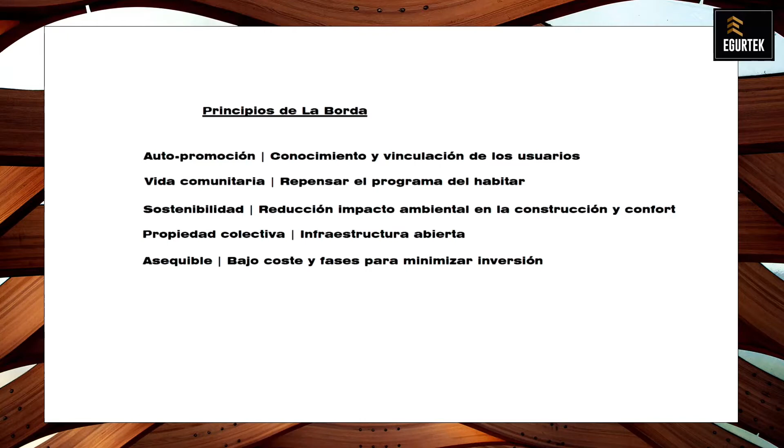Wood was very significant in making it possible to reduce the investment. It makes it possible to carry out cost reduction, and also makes it possible to work in phases and end up providing a high value structure. These are the users, the user participation from the beginning. They wanted to use wood. The uses included a community dwelling.

And this involves areas such as the energy issue with centralized energy systems. There's also the mobility issue. Finally, we did away with the underground car park. And we have health issues, domestic economy issues, a different way of thinking about the more classic dwelling. And these are elements that have been under discussion for many years. This doesn't mean less for us, it means more.

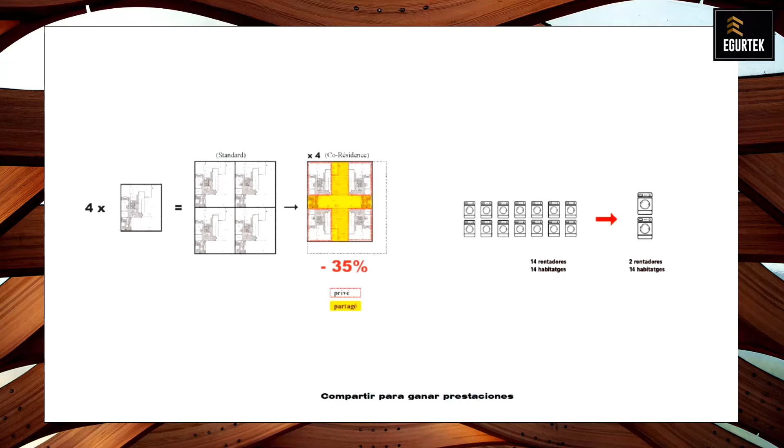Reducing the private spaces that need privacy and comfort 24 hours a day, and this has been partly replaced by common areas such as the laundry area or dining areas that mean fewer requirements. And here we had a shared laundry area, dining area. And this also made it possible to reduce or do away with the car park.

This was obligatory according to the regulations in Barcelona, but the ordinance was changed for the city to reduce the number of obligatory parking spaces for dwellings. The regulations were 40 years old, and as so often happens, regulations change much more slowly than society does.

And there are contradictions. You may be trying to design a building with a very low environmental impact made of wood, reducing CO2 emissions to 200 kilos per square meter and putting your stakes on innovative material. And on the other hand, you may have the obligation of having one or two story basements to be used as a car park, which means that to park a car, you're going to have a much higher environmental impact than the savings you're achieving up top. So this is a key issue, and there isn't an underground car park in either one of the projects.

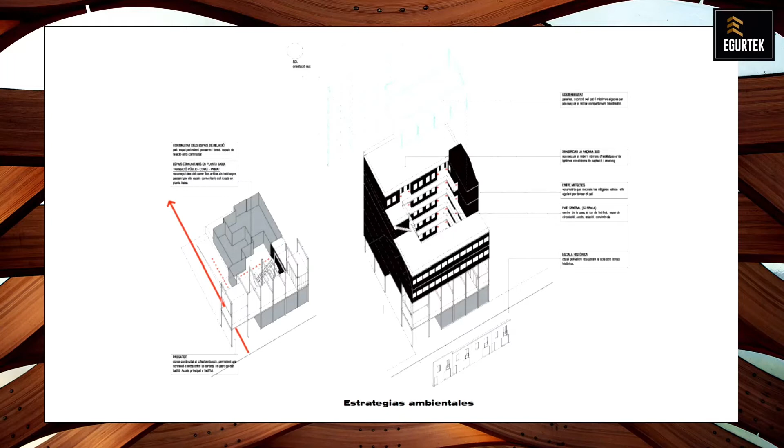And we had abundant glazing on that south facade. While on the north facade that faces the street with more noise, we reduced the number of dwellings on that side. And this was the multi-purpose area. It was left as a collective space for all kinds of uses with a low performance level. So this is the summer and winter approach.

In winter, closing the roof to make the most of sunlight, with a low need for heating along the south facade, which is catered for with small radiators. And on the north facade, in the 4 dwellings we have on that side, we improved the insulation through the carpentry work design, and their heat demand is 10 times higher because they don't have the benefits of sunshine during the winter.

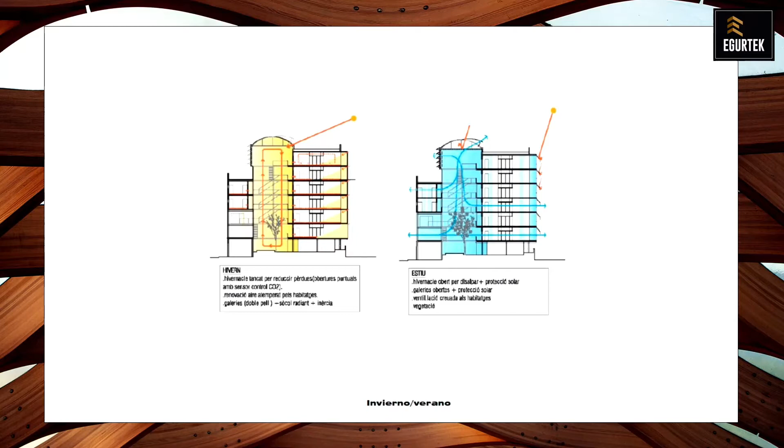We used wooden blinds on the south facade, and cross ventilation was maximized, with no active measures for summer, just the possibility of fitting ceiling fans to provide 3 or 4 degrees more comfort. On the ground floor, the building, as we see later on, is clearly separated with 2 types of structures, a concrete structure.

For us, it was important to recognize this public area and to differentiate it from the material of the structure. And this enabled us to deal with damp issues, fire resistance issues. We have a fire resistance requirement of 120, which is a problem with wood and with the suitable wood coatings. We always try to reduce the number of layers because of cost issues.

And here, with concrete, with outlining, we could obtain the necessary performance. And this plinth makes it more resistant for this public area that was going to be connected to a future public park and a cooperative store. Then the stairwell, the lift connects the street with the future park.

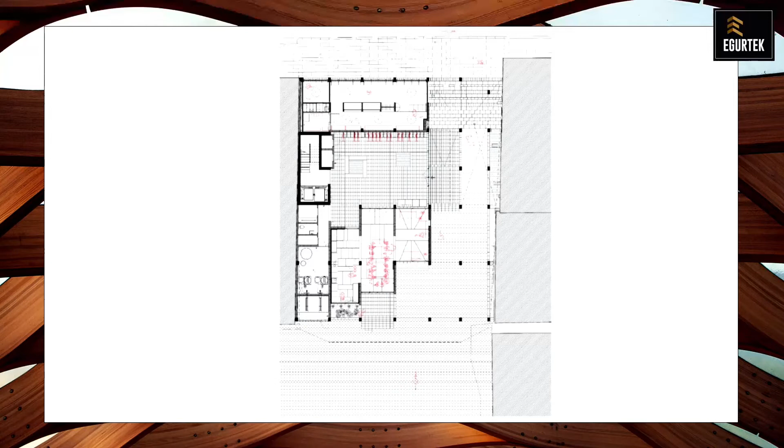And these vanes are related to the wooden structure. In this case, the bearing walls are perpendicular to the facade. These are improvements we made later, bearing the structure more on the facade, and this means that there are practically no compartments, and the rest of the partitions are designed by the users themselves according to their own needs.

The building was completed and was ready to hand over to the cooperative. We have only 120 CLT thanks to these small vanes of 360. We use the necessary coatings to provide fire resistance and also acoustic insulation with gypsum plaster to provide that acoustic insulation.

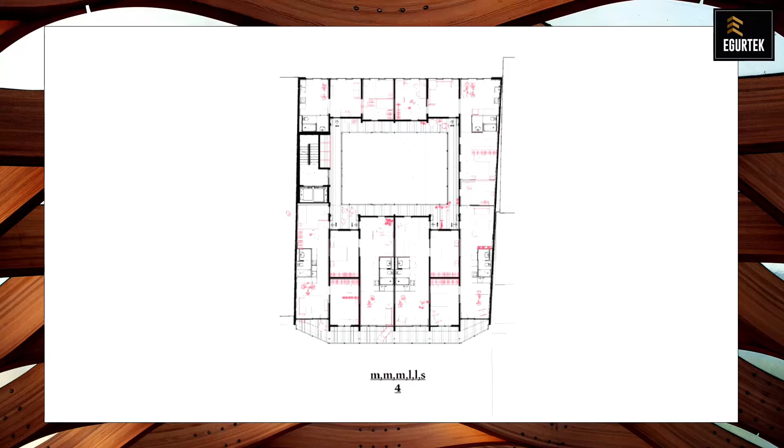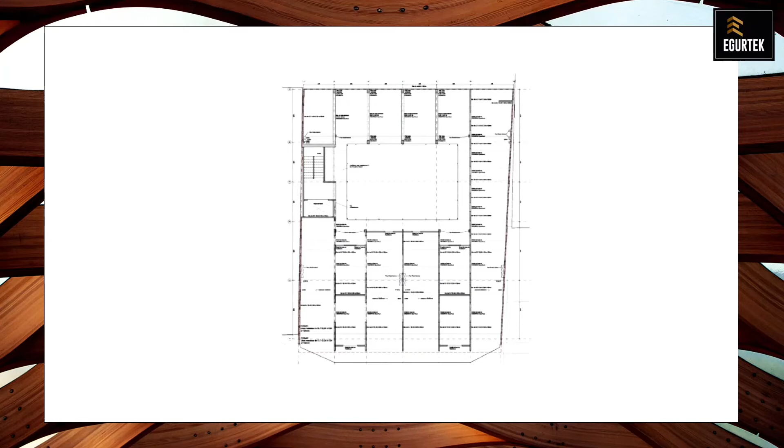And the wooden structure or insulating with wood in the rear area didn't make a significant contribution. But the design included sound insulation and airtightness, which we included also in the LaBalma project. And here we see the overall building design. We can see the perpendicular walls and the dimensions of the ironwork.

And here we worked with Egurtek. The control you can have over a project with a wooden structure compared to a concrete or metal structure. And this means that you have greater control over the project phase.

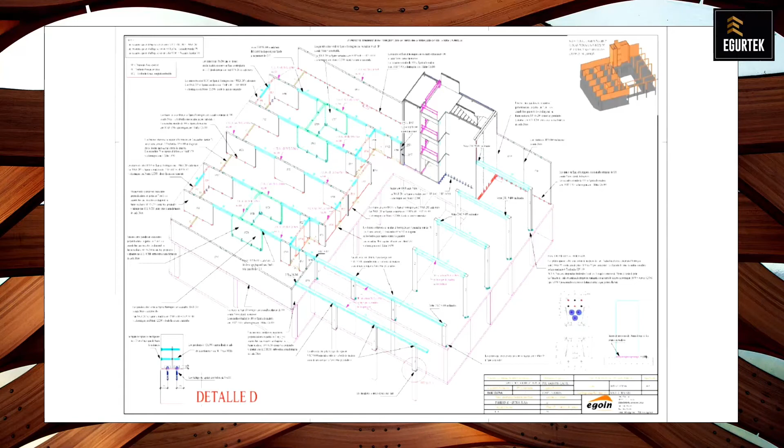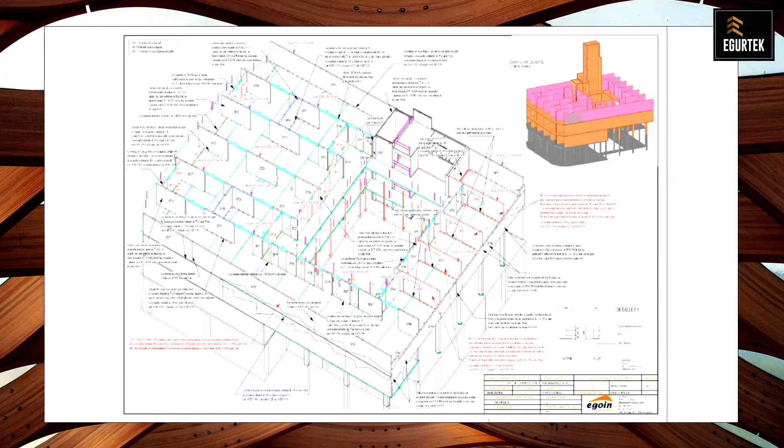And here we can see the walls, these perpendicular walls I mentioned earlier, and the vertical core that was completely prefabricated and fitted, and this meant that the stairwell was already included in the construction process as it started to rise from the beginning. This is a typical section of the building where we only have 21 centimeters in the ironwork.

This is one of the important elements, where we took quite a risk and we tried to provide the minimum cost solution to provide the necessary performance. It was a very economic solution.

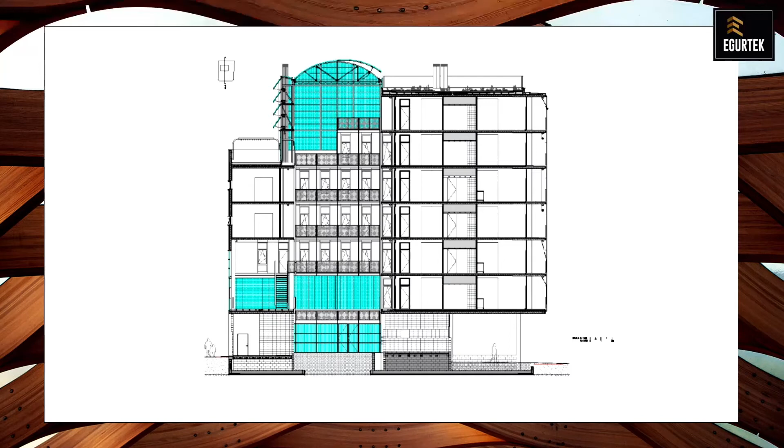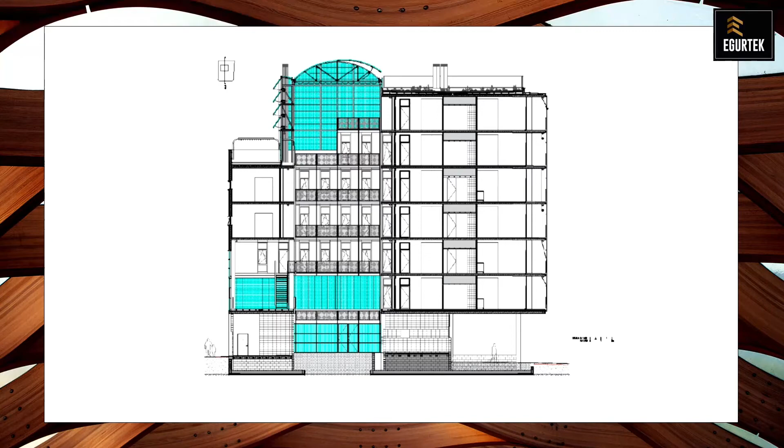And we can also see that central roofing that provides protection to the wood. It protects against rain, and the patio is a closed area where there's no rainfall and protected from the weather, providing a complete covering for the wooden structure, because it's important for us for the wood to be visible, and using wood as a final finish, using the characteristics of wood as a construction system. We wanted the wood to be visible.

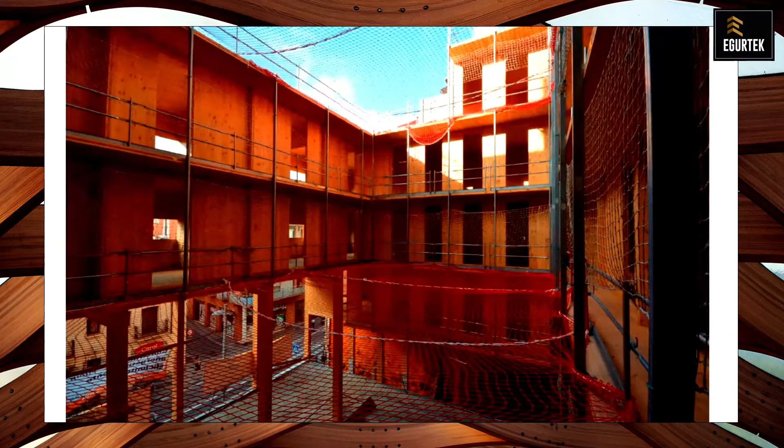And this is a concrete slab of 7 centimeters on an insulation layer, which is completely separate from the CLT structure. And here some pictures of the project with the amount of wood used in the overall building.

And this is an early visit from the participants in the project, the users. This is one of the advantages of using wood. After just a few months' work, you can get an idea of what the building and the dwelling will look like. And it's also true that this was a problem later on, because the users then had the impression that it was taking a long time to finish in the end. But overall, it is an advantage.

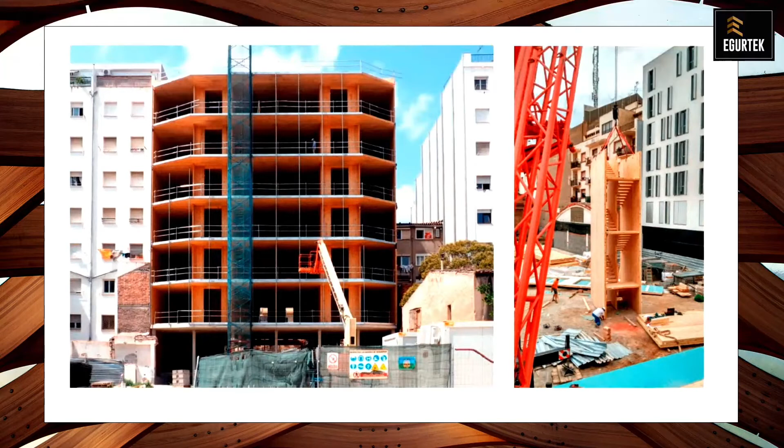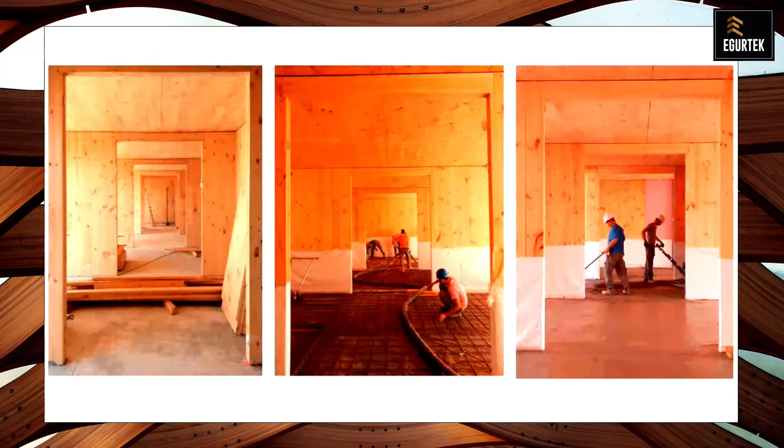And here we can see the entire structure and how it's installed in 2 phases. And here, from the first panels installed on the left, we have the concrete slab on the ground floor, the thermal insulation and the concrete paving. After placing the concrete. Although it is true that you go from a completely dry structure, and what you do is go back to a much more humid kind of construction in this particular case.

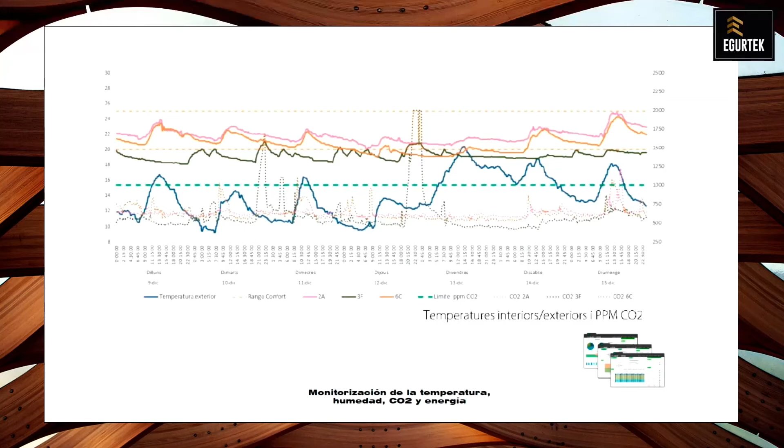However, on the northern side of the building, which is the green line in this case, the heating was supposed to kick in as from 18 degrees Celsius. And that's where the heating system was used more. But we've managed to achieve a significant reduction of emissions in the building. And here we have some of the real consumption figures compared to what the technical code has to say.

And this project carried out in Poblenou, this is another cooperative, and in this case it was a bigger distance because of the Sostre Cívic Cooperative, and we had a tendering process based on the LaBorda experience for cooperatives, together with teams of architects and economists for development purposes. It's in Poblenou, which is a location under transformation that is very close to the Avenida La Diagonal, one of the main streets. And here we had the same collaborators.

It's a building with 20 dwellings and something like 1,200 square meters. And it's currently under construction, and we want to finish the building next year in 2021. And here we are also cooperating with the La Boqueria Cooperative and Architect's Office.

It's on the road to Valencia, and it has all kinds of amenities in that avenue. And it closes one of the blocks of flats there. And that made us think about how important vertical circulation was.

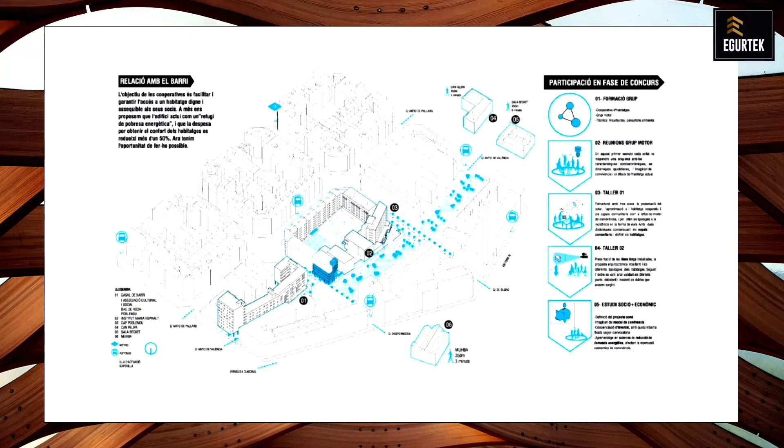And we connected this to this other section here that's much more public, with different kinds of public amenities. And well, that's when this school was built, which is right next to our building. So these are the different strategies.

On the one hand, the wooden structure, well, that was very clear from the very beginning, and it was one of the main elements for the tendering process. And we also repeated the concrete base as well as the wooden structure. And in this part of the nucleus, well, there was a slight variation during the basic project phase. We included community spaces there, like this filter between the more public and the more private space.

And then we have the walkways. They were located on the ground floor level. And other walkways were installed on the other side of the building at a higher level. That was an important thing from the very beginning of the project, because it brought about a change in the structure in the top section.

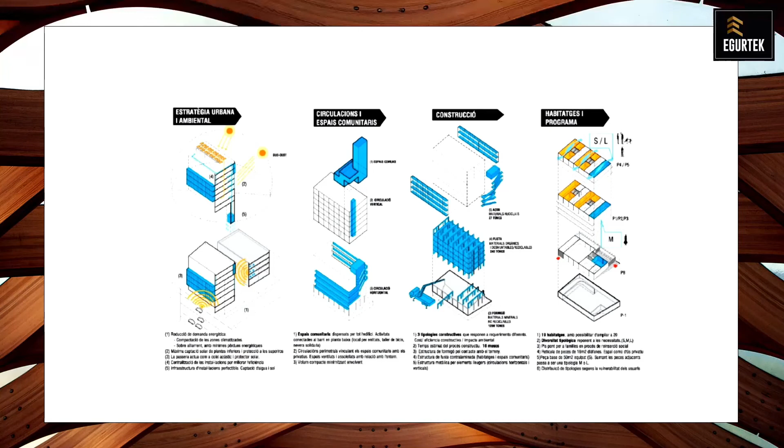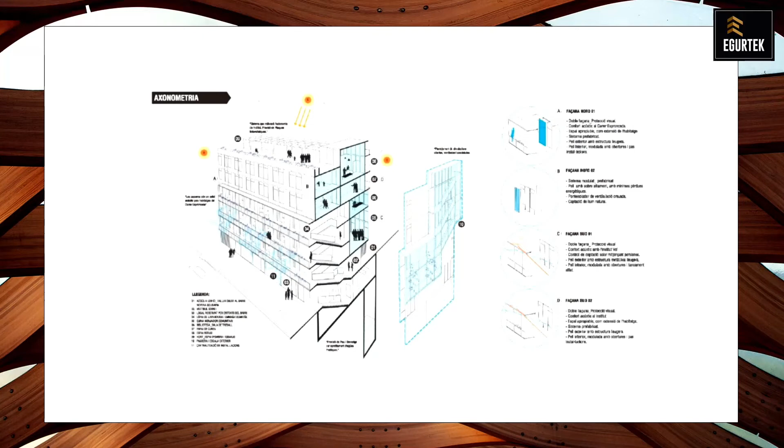And as regards typologies, that was pretty similar to what was done in the previous project, although with some slight variations and improvements. And these are the details that explain the nucleus and what it looks like. And this is a simplified picture, and this is the basic execution project, where you can see the change. You can see the walkways in the top segment and the access walkways to the dwellings, and on the other side of the building, we have other walkways.

And this is the more public part of the building, which is linked to community spaces and to the vertical staircase too. And on the ground floor, we have the local premises, and the community space, like in the LaBorda project, this served as a filter. We wanted to have a more public and pedestrianized area, and we have this community space with this outer space, which is the first element that serves as a filter when you enter the building.

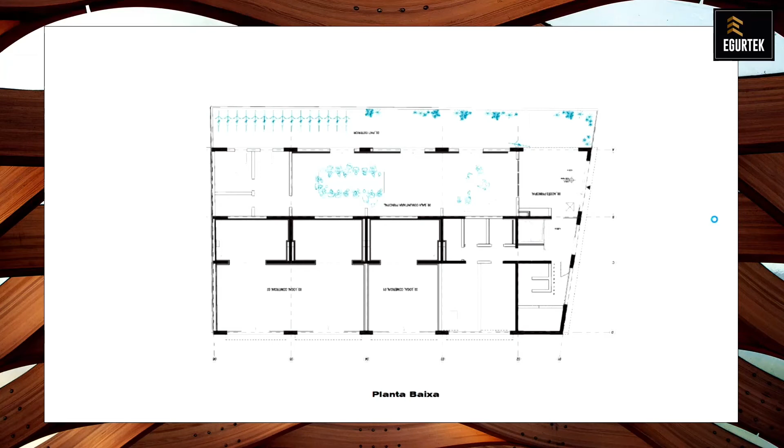And then on the upper floors, this nucleus, this core that I mentioned previously, that is also an irregular element, but the regulations were very strict about this, which is where we place the access nucleus with an open staircase, so it's open to the exterior, and then the lift, together with the community spaces of each floor, and the dwellings, and in this case, the structure was always in the perimeter. So there's an intermediate structure here. So there's a complete separation between the flats and the wooden panels. It's 14 meters from one facade to the other.

So this is how we managed to separate the wooden structure, because with the panels, there was a separation between the dwellings, and this allows you to achieve an acoustic improvement where, compared to the previous project, we used a completely different system. Because of the noise, there was a certain amount of discomfort, especially when there are elements hanging from the ceiling, or things like curtains.

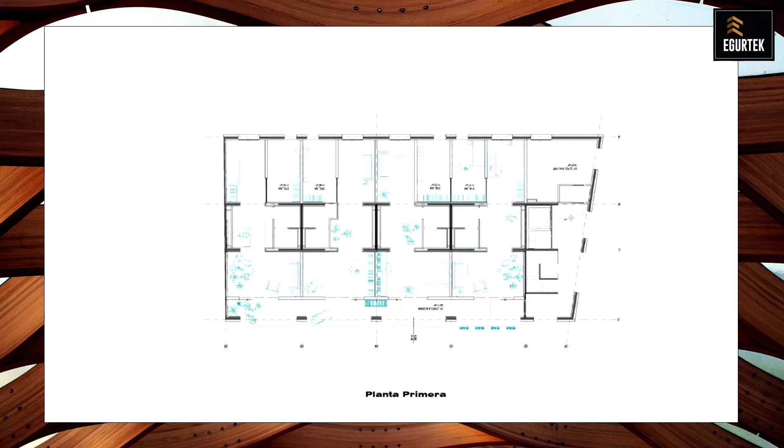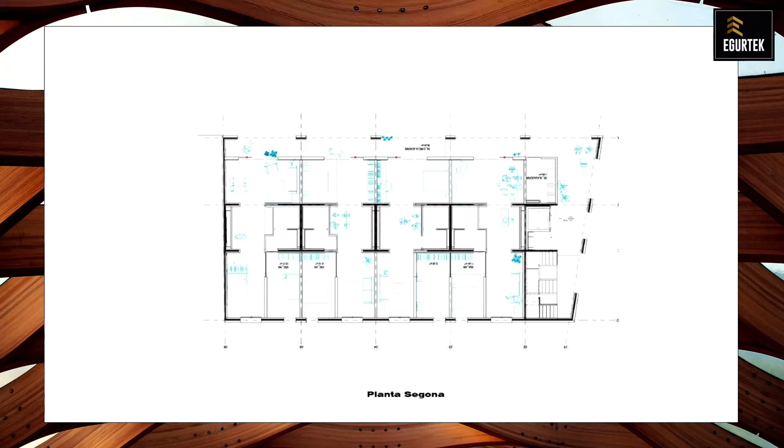And then the facade, the internal access facade, without a structure, which allowed us to perform this operation on the ground floor and on the upper floors too. So the wooden structure was maintained along the vertical axis of the facade. And here, this structure, this is where the bathrooms and the kitchens were located, that always concentrate on this central section, with variations depending on each dwelling and depending on the user's needs.

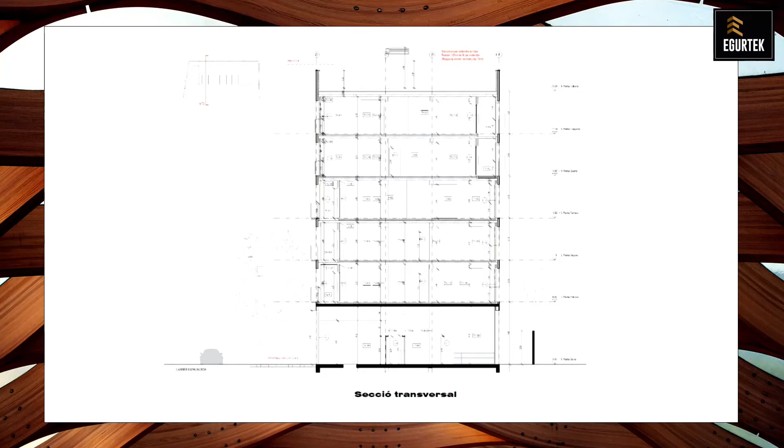And this is a cross-section where you can see some of the details. You can see the CLT panels. We have some larger spaces of 5.20. The CLT panel was 160. And from an acoustic perspective, here in Barcelona, performance was improved between one project and another. And apart from the technical code, we also improved the layering system, as we'll see later on.

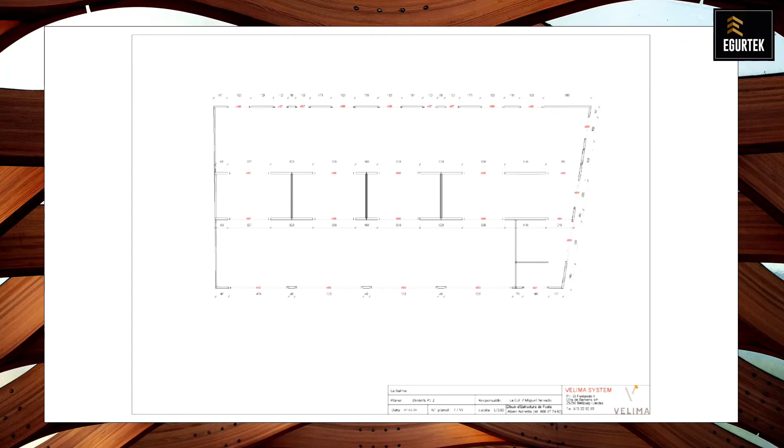And in this case, we used a special structure, as well as Douglas pine wood from France. It's 14-meter panels running from one facade to the other. And as I mentioned before, these are two U's that are separated from each other for acoustic issues, to improve the acoustics of the dwellings.

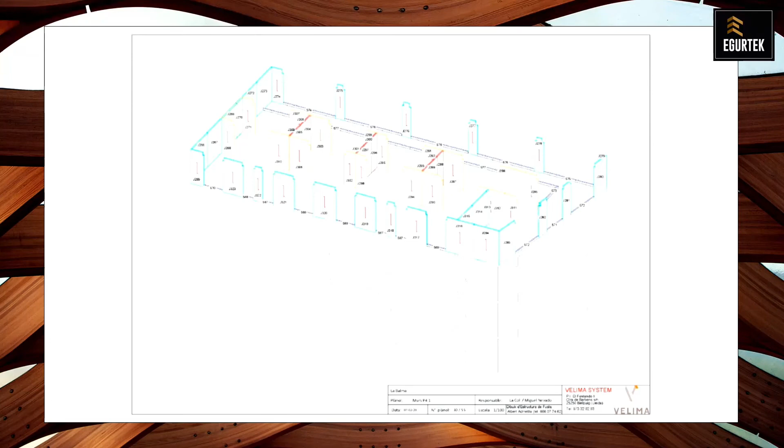And I think that you can see the U system in place, as well as the facade structure with the vertical apertures when we're dealing with the rooms, and with large spans reducing the structure, and also cladding whenever walkways had to be installed. And this is the top level of the building. You can see how we applied some rotation there for adjustment purposes.

And from a constructive perspective, the facade, as you saw before in the case of LaBorda, it's made of galvanized sheeting with a ventilated facade. And as regards the flooring, we had up to 17 centimeters, which was practically double compared to LaBorda, with more layers of material.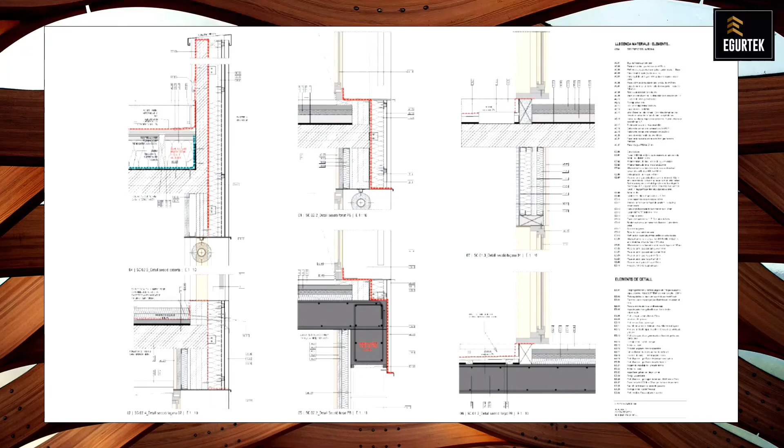And obviously costs were higher, of course, but in any case we had a much better acoustic performance. And then internally, because of fire issues and because of acoustic issues, we provided plasterboard cladding for the wood. And as you'll see, the facades, apart from having a plasterboard, also incorporated a radiating system. Well, this is the flooring, the details of the flooring during the construction phase.

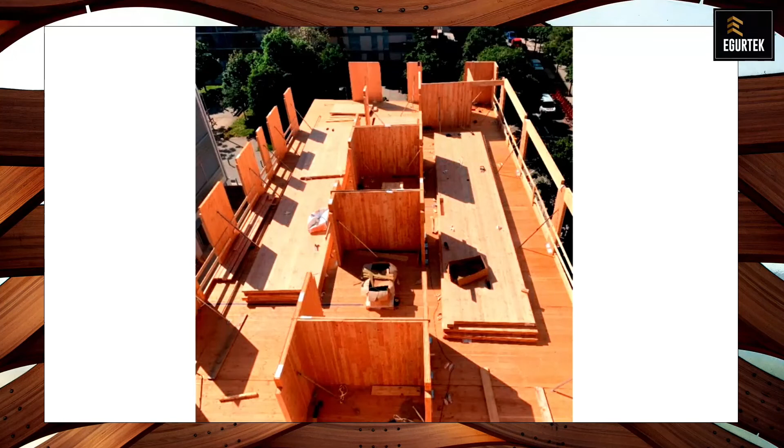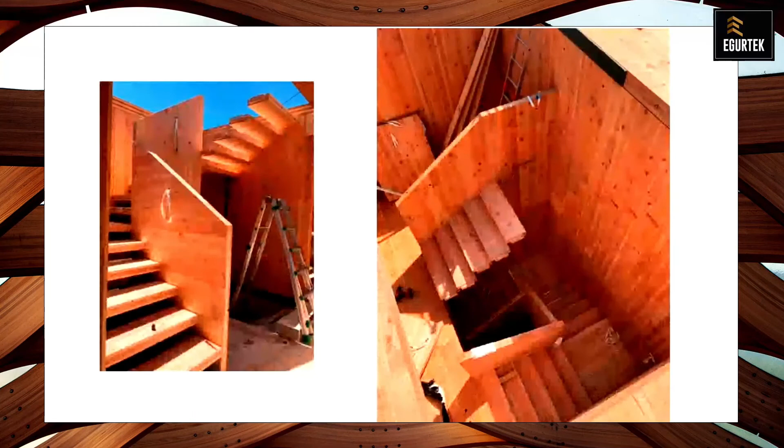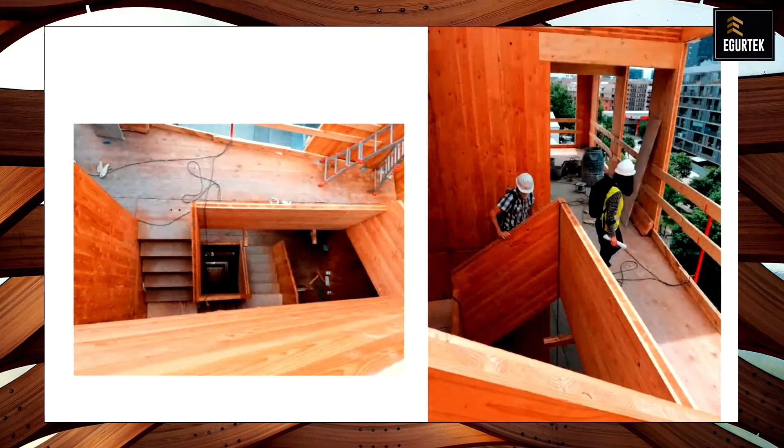We provided a separation between the U's and the staircase, which is also another important element, as occurred in the LaBorda building. And well, the upper floors open up to reach the roofing, and there's a skylight there that provides much more light. These are the facades with walkways where you can see how the construction work was carried out, and they are pretty open.

And it provided a beautiful structure, and this allowed us to reduce the consumption of wood. And it's a building that is easier to transform, and the only rigid part is the central section, so it has many multi-purpose spaces on each side of the building. And this is during the installation phase of the flooring, with the dwelling that runs all the way to the facade.

And here we have some more pictures of this week's visit. You can see the insulation material on the facade. And together, we also had to install the heating system for the dwellings, for the apartments.